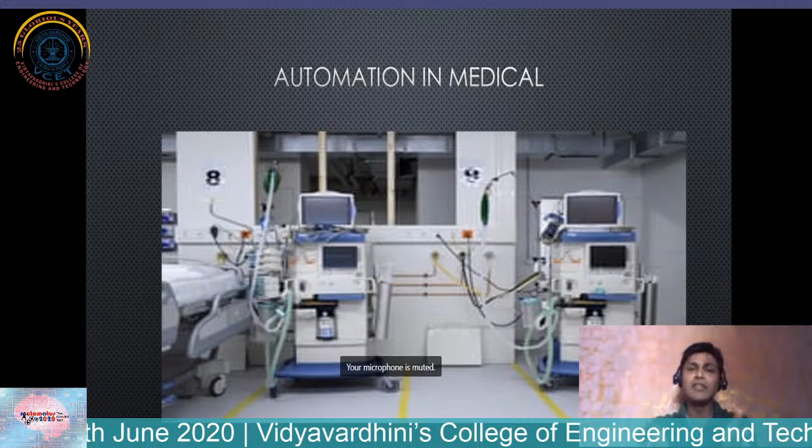So if you ask me, what is the automation in medical? We never thought about what automation could fill in medical devices like ventilators. All over the world, biomedical engineering is a separate field. But in India, especially in Mumbai University, you'll find hardly a few colleges. And that is the biggest problem, that our country is not focusing on the basic need of education, the basic need of infrastructure, where medical plays a bigger role. So let's have a look. What is the automation in medical? I will talk about the ventilator.

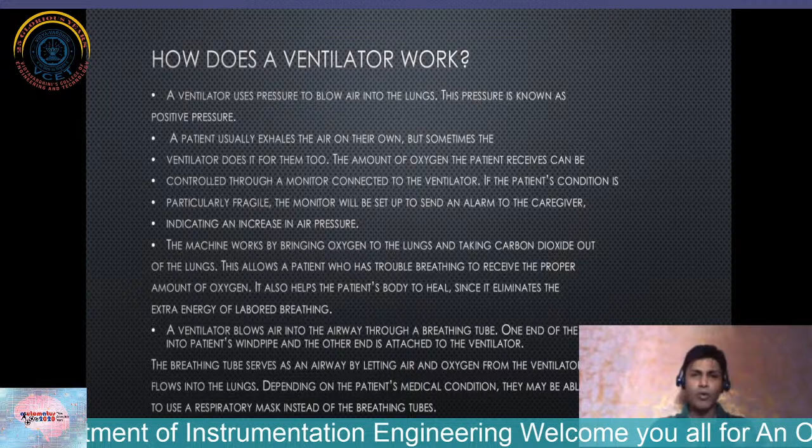Now, the medical industry is the least or zero affected in any recession. It may be the recession of 2008. It may be the recession currently going on due to coronavirus. The medical industry will never be affected in future also, because medical is the base, it is essential to human life. Now, talking about ventilators, why did the demand go high? Being a technical person, you have to think a little bit commercially or economically also. There was a time when the engineer used to take a screwdriver or repair with a multimeter. Those days have gone. You have to think jointly how it works techno-commercially.

This demand hyped up because, due to this virus, the oxygen level in your lungs goes down, and you need the ventilator. This is the basic principle of how ventilators work. The ventilator blows pressure into the lungs, which is known as positive pressure, and when you pump out the carbon dioxide away from your lung, it's called negative pressure. The patient usually exhales the air on its own, but the ventilator is a mechanical device used to pump the amount of oxygen based on the condition of the patient, and it is monitored. Now, what does monitored mean? The word monitor connects us with automation.

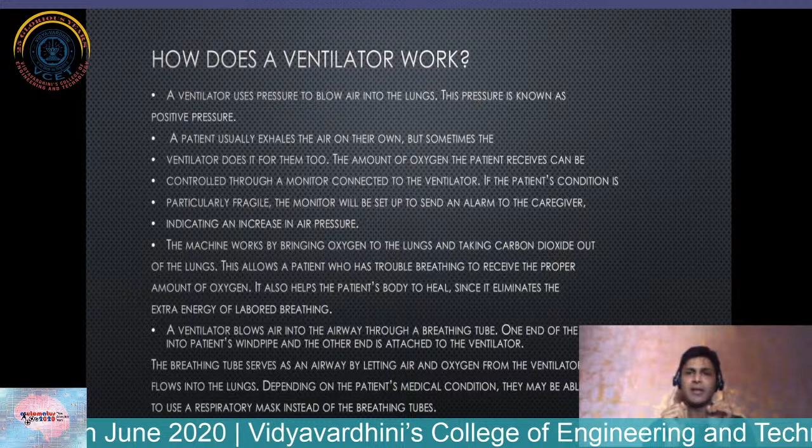Though it is called a mechanical ventilator, this complete ventilator has a microcontroller or PLC, HMI, programmable, and there are products which play a major role, without which the ventilator won't work. That is the sensor. Now, which kind of sensor is used? I'm going to come to how the sensors work, what standard they work to, how these sensors are modified and shortlisted, and what are the brands or makes in this.

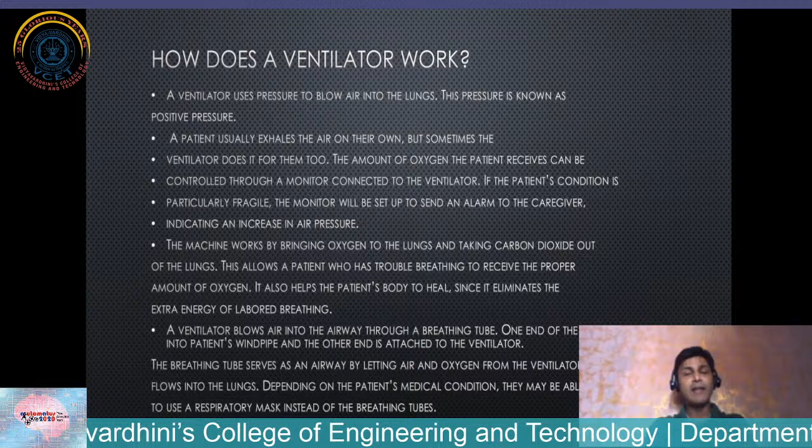So going further, as you know, ventilators are required and we require air and oxygen in this. Basically, the sensors which play a role are the oxygen sensors, the airflow sensors, and the pressure sensor. Oxygen is essential. When oxygen comes from the cylinder and blows into the lung, it has to go in a proper amount based on the patient condition, as well as the air. Secondly, the pressure has to be controlled.

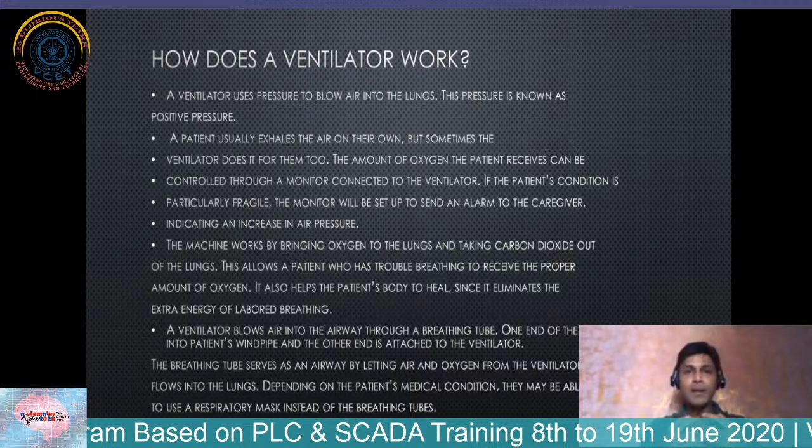If the pressure and the flow is not controlled, definitely the patient will die because of the excessive blowing of the air before he will die of coronavirus. So there are many cases which came on the news also that it was due to the ventilator failure. Long back, I remember 1 year ago, because the oxygen cylinders were not available, the ventilators were not working, a few kids died. So this is what the ventilator is all about.

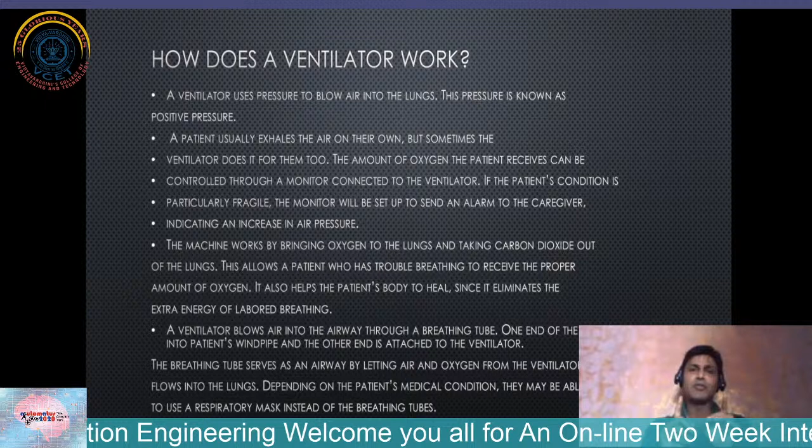If it is not calibrated from time to time and it is not properly working, this failure may lead to death. So it is very important that a ventilator should have proper sensors in it. And the three main sensors, I'm repeating, are oxygen sensors, airflow sensors, and pressure sensors, which play an important role. So sizing of the sensors is very important. So this is all what ventilators are about, and everybody is aware about ventilators.

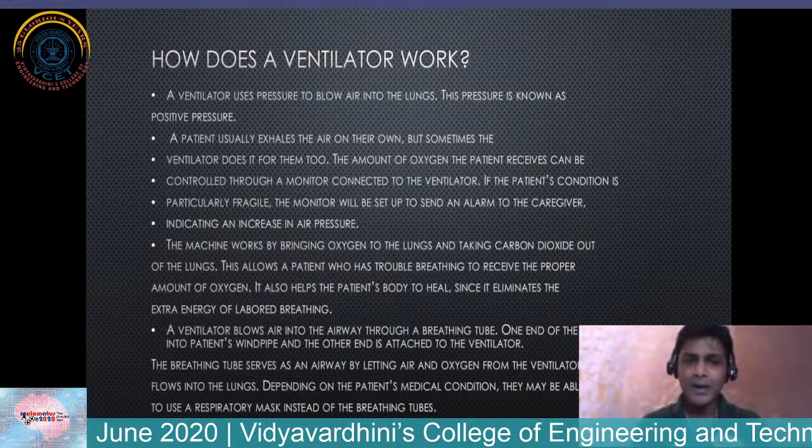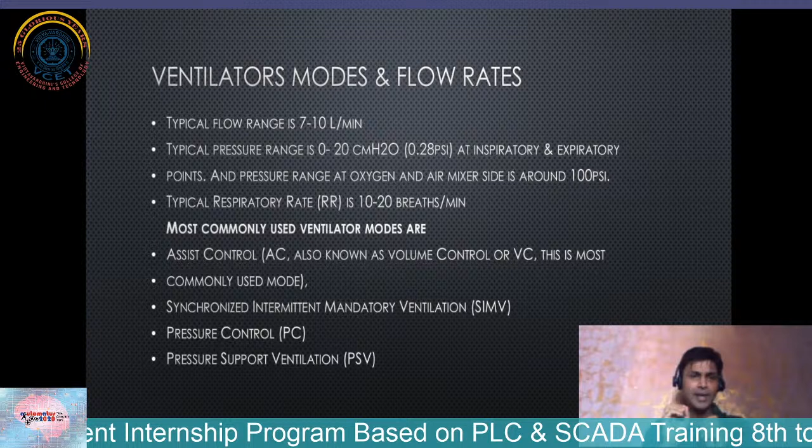Now, the typical types of ventilators are portable ventilators and stationary ventilators. There are ventilators which are used in ICU, but they are a little different, because ventilators basically depend upon the working mode. So let's go forward and try to understand what the ventilator modes and the flow rates are. Now, a typical flow range is 7 to 10 SLPM, standard liters per minute, and the typical pressure range is 0 to 20 centimeters of H2O. This unit, cm H2O, is typically used in medical applications or medical devices.

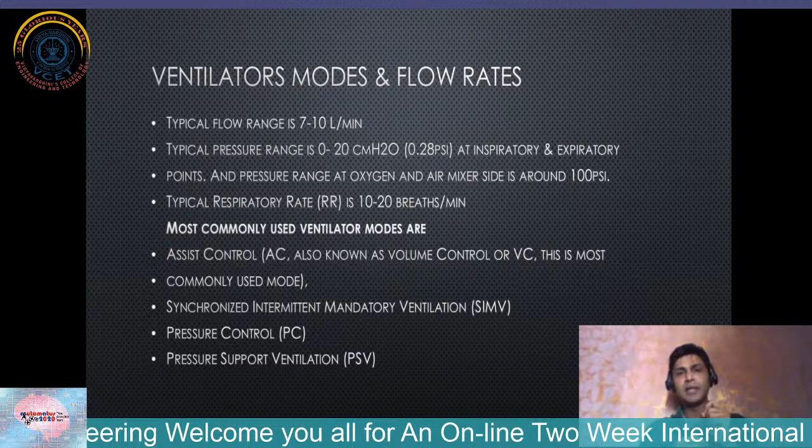So when ventilator manufacturers come to us for selection of a sensor, we know what first question to ask. A ventilator manufacturer says, okay, I am manufacturing a ventilator, so I need a sensor. We ask the first question from an engineer's point of view: what kind of sensor do you need? We need to know the flow rate. For the airflow sensor, the standard rate for airflow is typically around 0 to 200 SLPM. It varies, 100 SLPM.

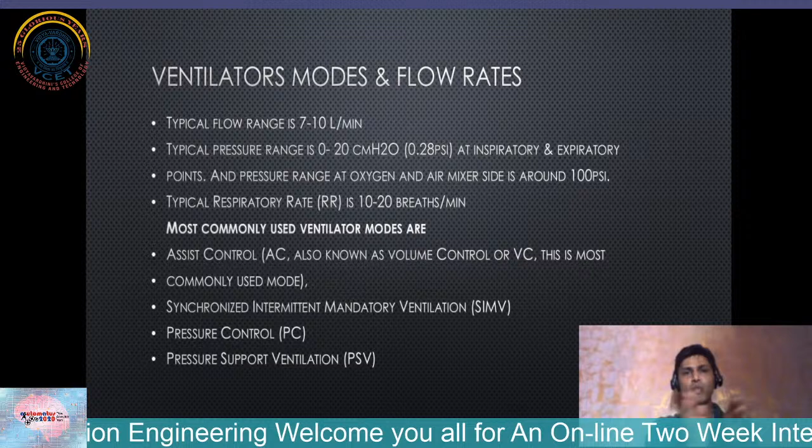But when the pressure range comes, we again ask whether the pressure is going into -1. Many times, the pressure range is different for each ventilator manufacturer. Typically, one of my customers is taking a -1 to 1 pressure range, so it comes to -1 psi, which is the typical pressure range he believes. Other customers have different pressure ranges. So it depends upon the flow range and the pressure range, and it depends completely on the design and where they are going to use it.

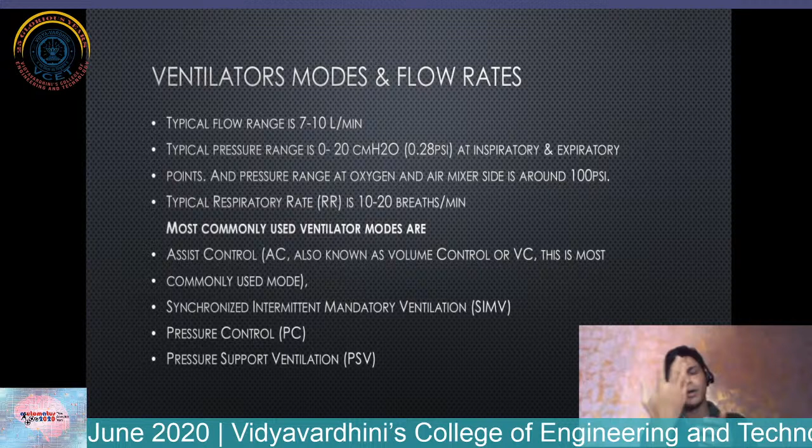These typical ventilators I'm talking about are adult ventilators, for 12 years or above. So typically the customer asks me for airflow sensors, pressure sensors, and the oxygen sensor. Now all these sensors depend upon the flow rate for the airflow and the pressure range for both. So typically when the customer designs it, they require all three sensors. Any ventilator manufacturer, without the sensors, can't manufacture the ventilator.

Now, coming to the airflow sensor, there are two types of sensors: first is the disposable type, and second is the stationary type. The word stationary means that the airflow sensor will typically be mounted in the design of the ventilator where the air comes from the cylinder. But the disposable type goes almost near the nose or mouth of the patient, and after it is used for one patient, it is disposed of immediately. It can't be reused. So these are the differences between the two sensors.

So in future, if you visit any ventilator manufacturer or a hospital, if you find some sensors near the mouth or the nose of a patient, those are typically disposable type airflow sensors. And if you find normal tubes, the sensors are inside the ventilator. So this is the difference between the disposable type and the stationary type airflow sensor.

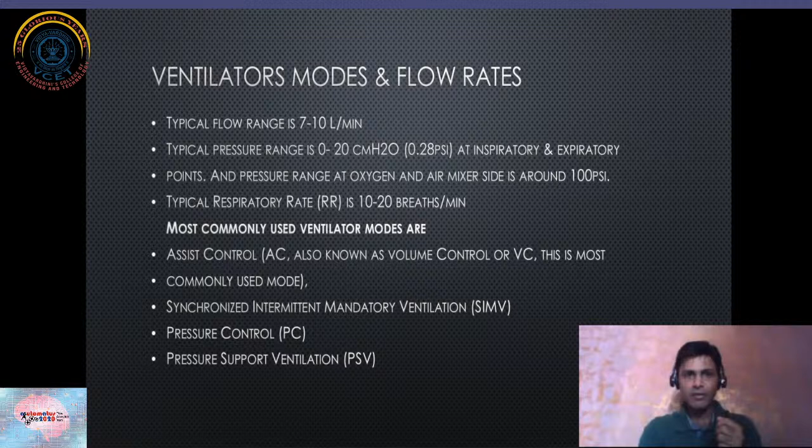It depends upon the design, because there is a humidifier before the ventilator, and the temperature, because when the air flows, it matters at what temperature the air is blowing: standard room temperature, which is allowed, or well below or above room temperature. So there are typical sensors like the HIH series sensors from Honeywell that we propose. Pumps, motors, these are the basic things.

So basically, before the valve, all these sensors are placed in front of the patient. Unfortunately, I was not able to add the actual flow diagram or block diagram showing where the patient and ventilators are placed and how it works, due to some constraints of my PPT and lack of time. I'm really sorry for that. But these are the basic components in the ventilator, and all the manufacturers go in this typical way.

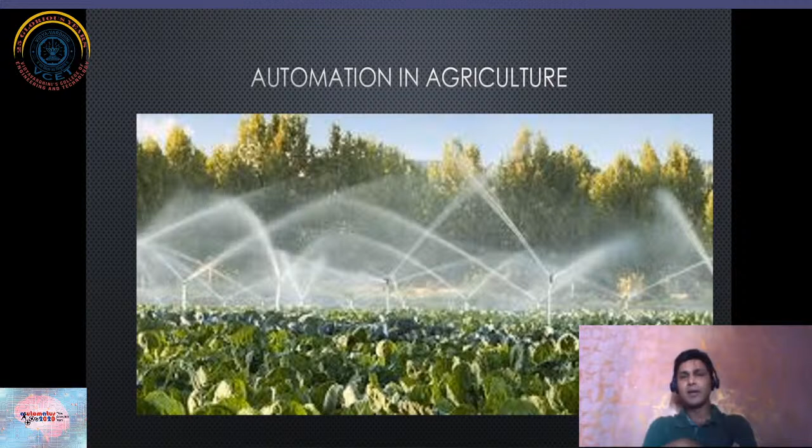Now this comes under automation in infrastructure. In a city like Mumbai, where I stay, there is a problem of car parking. Due to car parking, many people plan to take not a sedan but a hatchback. Why? Because of the parking problem. I have no parking in my lane. I have no parking at my office. We travel by train, but the train is overflowing. So what to do? So now, to avoid the space constraint, there is automation in parking.

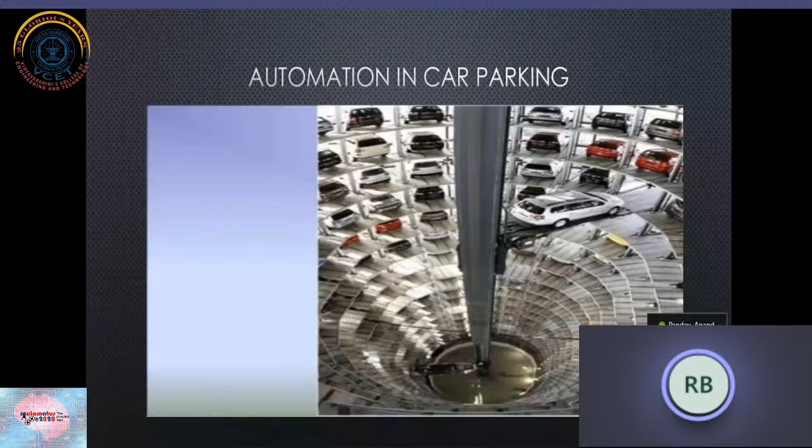So you will ask, what is the automation in this? The main automation is that all this is programming based. So how is it program based? Take an example of puzzle parking.

Now in puzzle parking, I have a car above me, a car below me, and a car next to me. Now I have this WagonR, I have to remove this car. So this car has to go on the side, behind, upside, or front. Then this plate will come down and I will be able to take it down.

So all this goes to a PLC programming, and this PLC programming is done by the automation engineer. There are two strong companies in India. One is RR Parkon, the group of Ramratan, RR Kabel. That is RR Parkon, one of their entities.

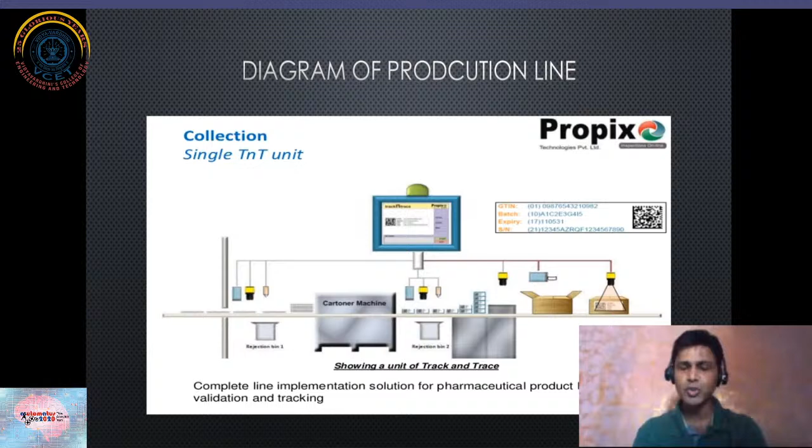I will show this in the next diagram. This is how a typical pharmaceutical production line works - the line integration, generation of the serial UID at multiple levels, and integration. This is the core, this is the thing which is very important in your medicine.

Now, if you recall, two months back when hydroxychloroquine was banned from India, and Trump asked our Honorable Prime Minister to start the supply, there was news on social media that India had asked to ease the rules of the US FDA. Now, the US FDA - whenever Indian companies are struggling to export maximum ready-made medicines to the US continent - the problem is that the US FDA feels Indian manufacturing is not up to the standard mark of the US FDA.

So what does this mean? In India, Sun Pharma and Cipla, they have faced this US FDA issue. Let me take you back to when I was working at Mitsubishi and handling this project, for a company called Sun Pharma. Overnight, there was a ban by the US FDA that none of their products would be allowed on the US continent or European continent. They were shocked - why? Because their production facilities were not up to the US FDA mark.

So what to do? Yes, you have to upgrade. What's the upgrade? Your GTIN number, your expiry date tracking, and a track-and-trace application had to be implemented. After that, within a span of 6 months, Sun Pharma's Halol plant upgraded - almost 500 machines were upgraded - and they came up to the US FDA mark. Then Cipla was the second one, in 2016, implementing this at their Patalganga plant, and all their plants came up to standard.

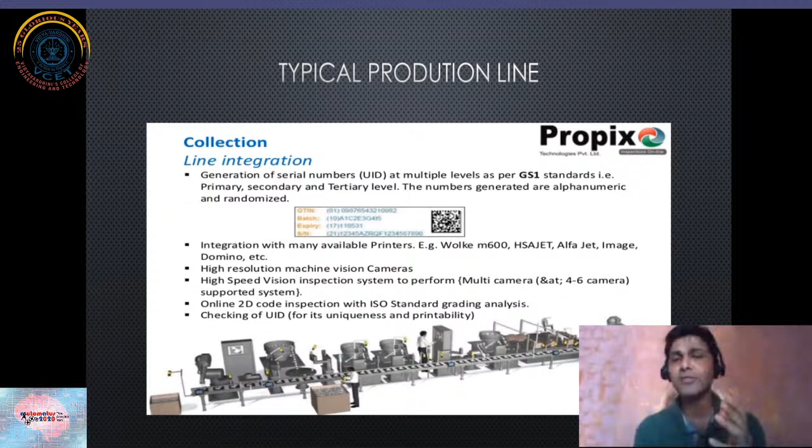Again, you have your cloud license, your camera, your high-speed resolution vision machine - everything has to be implemented and upgraded. So this is the cost involved. Typically, if you want to invest in upgrading 10 lines, your budget should be more than 5 to 10 crores. This is what the pharma industry was struggling with, but luckily the Indian pharma industry identified the challenge and made all these changes.

So this is how the typical collection works. Typically, the local pharmacy, when they track and trace, connects to the global server. This is a pharmaceutical plant. When they dispatch it, there is a wholesale pharmaceutical in between. They will know which batch it was manufactured in, at what time, who was the operator handling this, when it was introduced in the pharmaceutical wholesale, and when it was distributed. So the trace will definitely move back slowly to the manufacturing plant.

Suppose a Cipla medicine malfunctions. So it was manufactured in which plant of Cipla? Whether it was the Pithampur plant, the Patalganga plant, or any other plant. Once the plant is identified, they will identify the batch number, on which day, who was the operator, who was the engineer, who was sitting in the control room, and they will take the trends of the SCADA, and everything will be investigated and they will come to know.

So this is the implementation of US FDA. They know the life of the human being is precious, and that's the reason all the data collection is in the micromanagement system. In India, they've already started this. If you see your medicine, you will find the QR code, the 2D code has been implemented.

So this was all from my side. Now this is the question and answer session. If you would like to ask a question, you are open to ask.

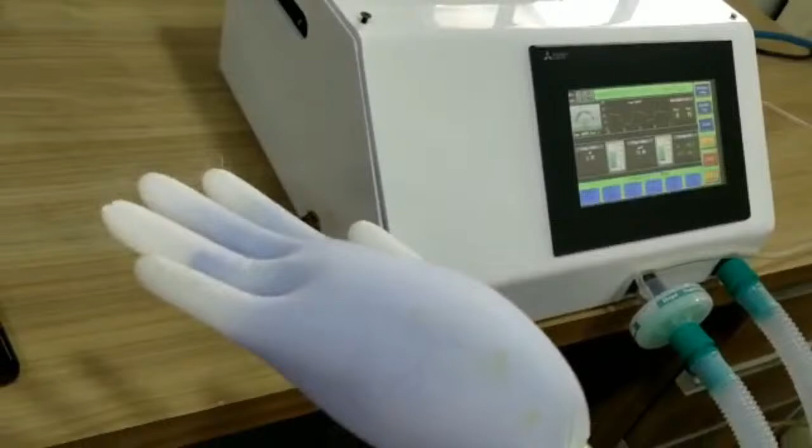Okay, just let me know when it started. Okay. Started? Okay, okay.

Basically, you can see this is the HMI, and on this HMI you are controlling all your graphs and the patient. Normally this is the prototype, no patient is connected, but instead of a patient I am using this. This is the lung, I'm blowing into it, contracting and expanding it. Just see. Okay, this is the ventilator.

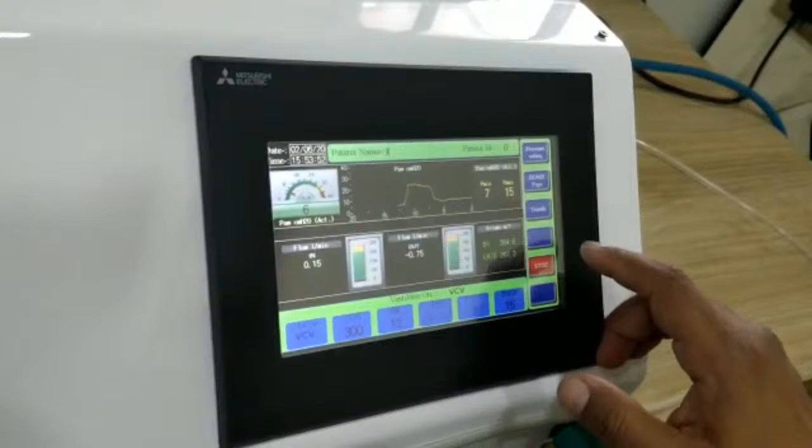This is the top part of the ventilator, where they have fed the recipes, different recipes. This is the reading, you can see the graph, the reading of the airflow and the pressure is monitoring where the respiratory condition of the patient is monitored by the doctors. These are the different settings you can see.

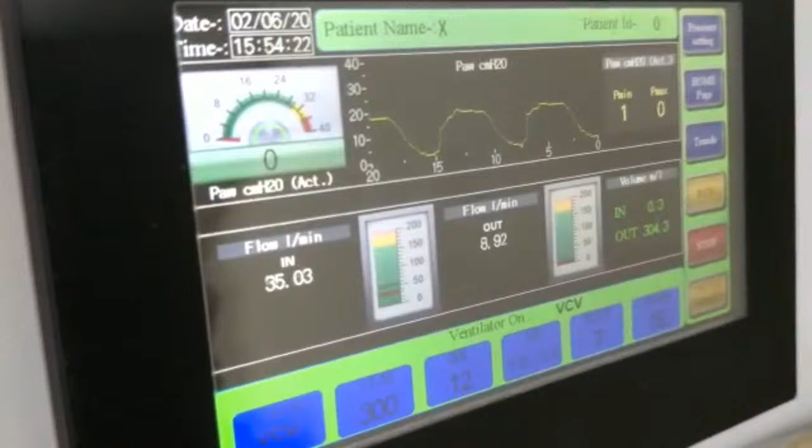Basically what I mentioned here is the PCB, there is a microprocessor controlling this with a pressure sensor for monitoring, and a pneumatic manifold with bellows, because our lungs are basically made like this, they expand and contract, so that's the reason we display this when we inhale.

So we can adjust the frequency, and we can adjust the minute volume.

So this is what the design is all about. As I mentioned in my PPT, there is no rocket science in ventilators, and I missed one point - there was news 8 days back in the newspaper. See the bellow, you can see it expanding and contracting. This is how the patient inhales and exhales. So this is what the prototype is all about.

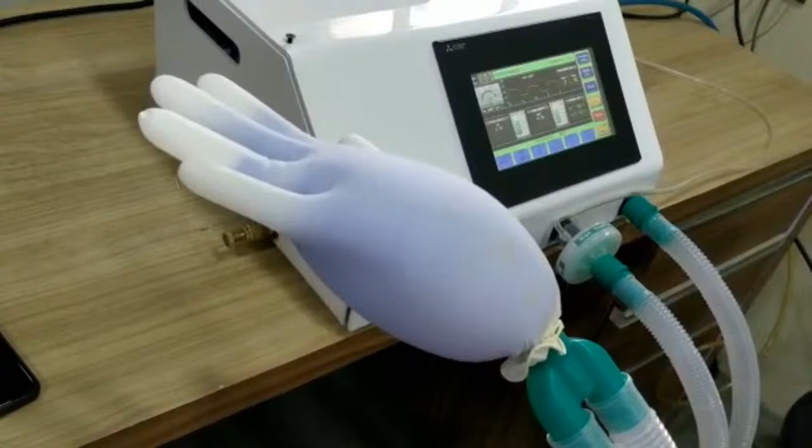I was mentioning that NASA, the space heroes of the world, has transferred the technology of ventilator making to 3 Indian companies, one of which is an automobile company.

These are the settings for pressure limit, frequency, and volume. This is a very basic project that final year students can do. Disappointingly, I see final year students go for very basic projects. They should take risks because you are the seniors, you are the future of the country.

You need to do some great project. What I've seen, you can go on the medical side. One thing I observed is that instrumentation students don't go on any biomedical project. They had a biomedical subject, but they don't go on a biomedical project. They can go on biomedical projects. They can go on basic incubators and all, or they can go on some IoT project, the basic project. So there are many projects to discuss. It completely depends upon the interest and the budget of the student.

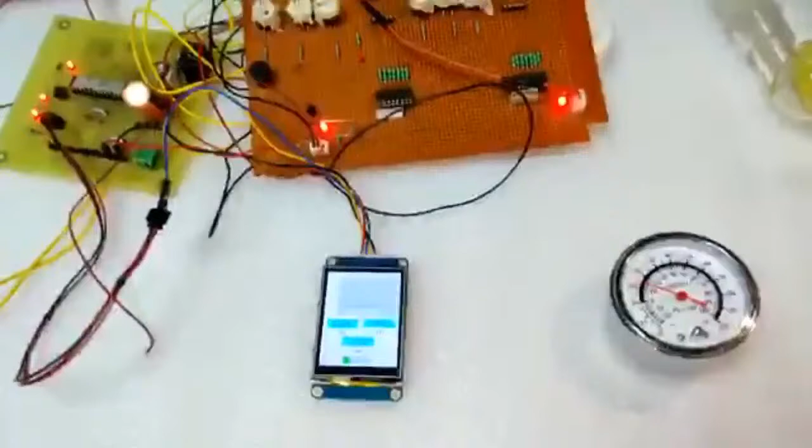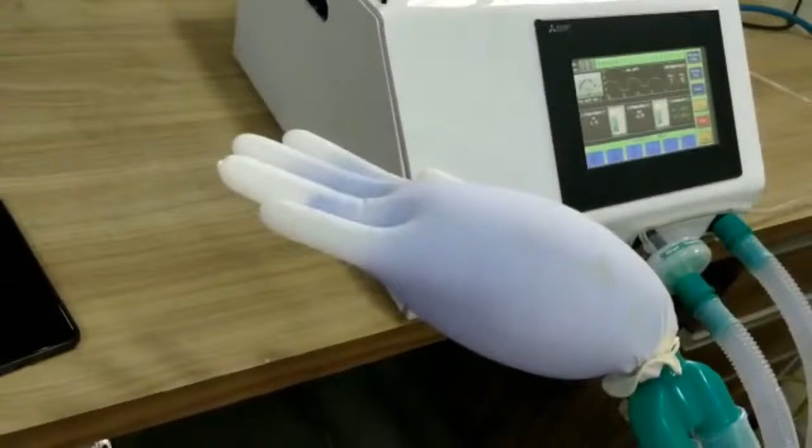The next question: which are the free software of PLC and SCADA? As of now, in the world, there is nothing free, you can say. But there are some makes like Omron Automation. They have a free trial version of 1 month online, so you can download it and have it for 1 month. But PLC software is where the company margins are attached. So I have never come across any free software for SCADA and PLC, but there are some trial versions for 1 month. You can try Omron Automation.

What is the cost of this ventilator currently? Now, this is a very tricky question. Hopefully I will not be seen as a competitor of any ventilator manufacturer with this answer. So see, if you see the news, Mahindra claims that they have manufactured ventilators around 5,000 to 10,000. But the story behind this was different. Mahindra just developed a prototype in which the sensors and valves were not there.

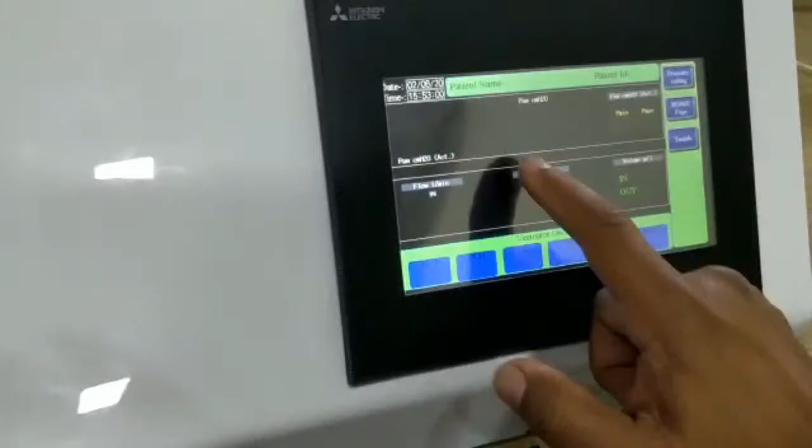The sensors cost you more than 10,000, and a minimum ventilator, even if you reduce the cost of everything, costs you around 80,000 minimum. And if you go for the additional PLC, the HMI, and a very high-tech ventilator, it will cost you about 2 lakhs, 3 lakhs. It completely depends upon what kind of BOM, bill of material, you are adding in it.

Sir, can you give a brief about the IIoT sensor? So basically, it is the IIoT sensor with an IODD chip. It's a sensor which looks normal, but if you open it, there is a chip inside. Cost-wise, a normal proxy sensor costs you around 100 rupees, 200 rupees. If you go for a brand, 500 rupees, and the IODD IoT sensors cost you around 1,200, 1,500, depending upon the make. So this is a brief.

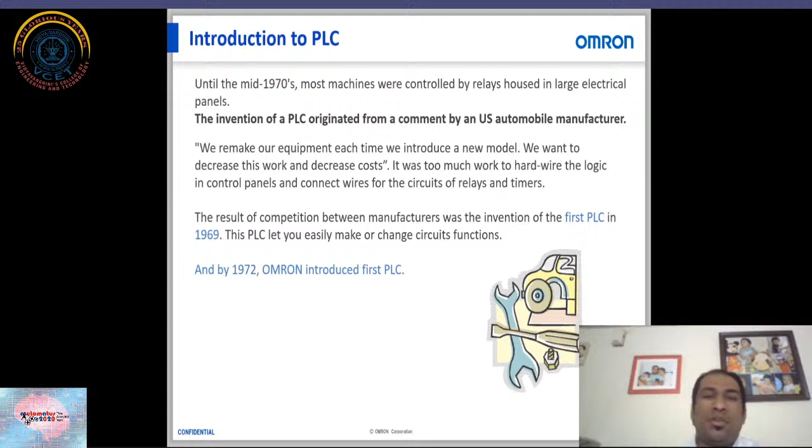So what is basically a PLC? A PLC is a solid state device which simulates electrical components including standard relays, latching relays, electronic timers, counters, and other components, or it's a digital electronic device with a programmable memory. So based on the input devices you connect, the logic you develop, and the outputs which are connected, you can build a digital electronic device with a programmable memory.

But let's talk about the relay-based system or hardware type control panels. If you want to make any small modification, so much work is involved, so much wiring. And sometimes if there is a small disconnection from the panel, you may have to backtrace all the way to the panel. So it was a very hectic job. So now came the PLC. The PLC reacts to changes in signal sources such as push buttons.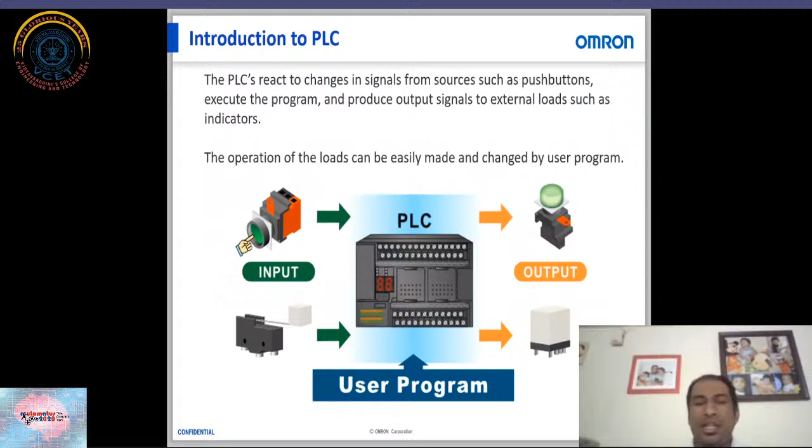Motors too, all these are considered as outputs. So basically we have input, then logic, then output. These are the main things related to a PLC. Now let's see the PLC block diagram.

So why have we introduced PLCs in industry? Earlier we had relay systems, then there came a requirement for a more rugged system which can be programmed. But why can't a PC be used in industry? Because PCs are unreliable in the industrial environment. So we cannot go ahead with a PC based system in industry if the environment is not good. So we came up with the more rugged model, that is a PLC.

So let's see the PLC block diagram. It is similar to the desktop PC you use at home. We have an input interface, just like you have a keyboard and mouse, then you have a CPU, that is basically the PLC CPU. So microcontrollers will be inside: memory, CPU, and then power supply should be given to the CPU.

Then you have a display, that is your display screen. We have output devices. So if you compare it with a PC, it's similar to a PC only. We have an input interface, we have a controller, that is a CPU, then we have an output interface. If you talk about PLC, we have an input interface. Similarly, we have a CPU, wherein you have to give the power supply to the CPU. Then we have output devices.

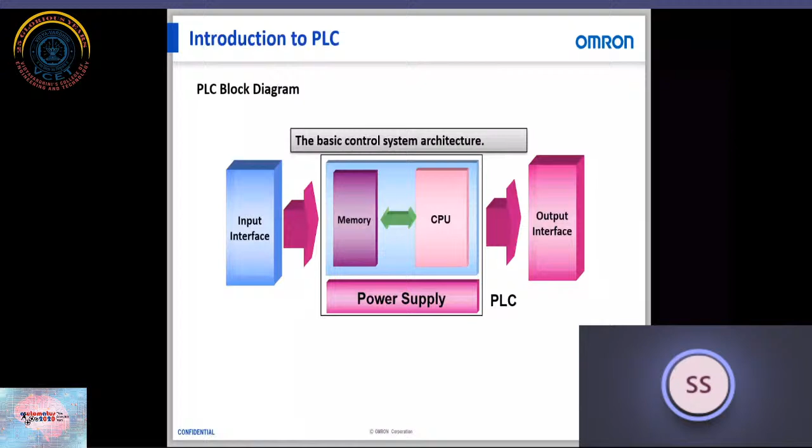Before going further, I would like to explain that when you talk about the CPU part or the controller, normally in PLC we use an application specific IC. So that is known as ASIC. So an application specific integrated circuit will be used inside a PLC, not a microcontroller based system. Earlier it was not used. Earlier it was only application specific IC.

But now, if we talk about Omron, we have introduced our Intel based system from 2011 onwards. So we have high-end controllers, one of the most sophisticated controllers we have right now, which is operated by an Intel Core processor. So an i7 processor we have in our controller now. Similarly, in the old system we had microprocessors, that is ASICs were used, application specific ICs.

Coming to the input interfaces which we normally use. If we talk about PLC, normally we discuss only digital input or discrete input. In discrete input, we normally have only an on or off condition. This is either 0 or 1. Just like in a PC, you have a binary 0 or 1 system. Similarly, in PLC also, we normally prefer discrete inputs, that is either 0 or 1.

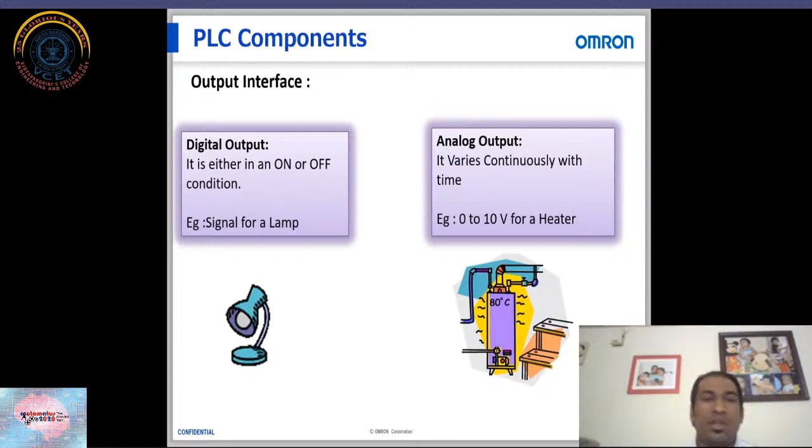If you see the conventional panels which we used years back, everything is relay-based logic. Now also, in PLC we have ladder-based logic, which is similar to the connectivity we do in relays. We are using contacts and coils in that also. But the amount of wiring used in conventional panels is very large scale, and if you want to modify a small logic, it involves so much wiring.

So without PLC, it is necessary to rewire devices to change the operation of machines. With PLC, you can simply change the logic from your PC or your laptop, and you can directly program it into the PLC. Only minor changes are required. We are not saying we can completely remove the wiring part, but wiring will be limited.

So what are the advantages we have compared to the conventional panels? We have smaller size and more flexibility than their hardwired equivalent. Then the diagnostic function. This is a very important function. The diagnostic function makes monitoring and troubleshooting very easy.

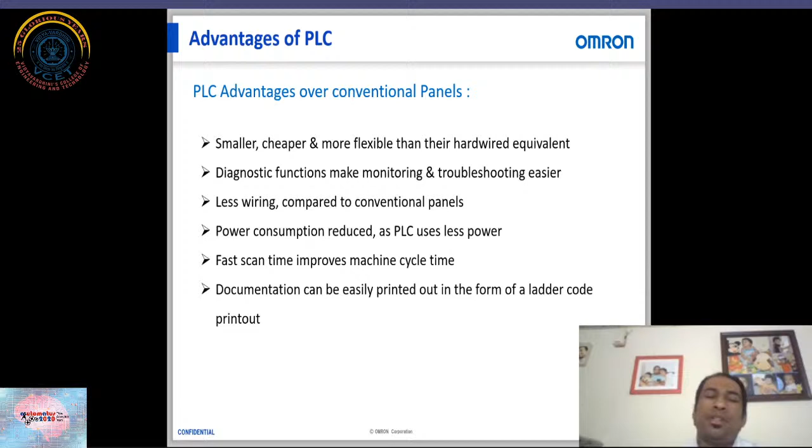Then documentation can be easily printed. That is, if you have developed a logic in ladder logic or any other logic, and you want to make a manual out of it, you can simply print the logic directly from the software.

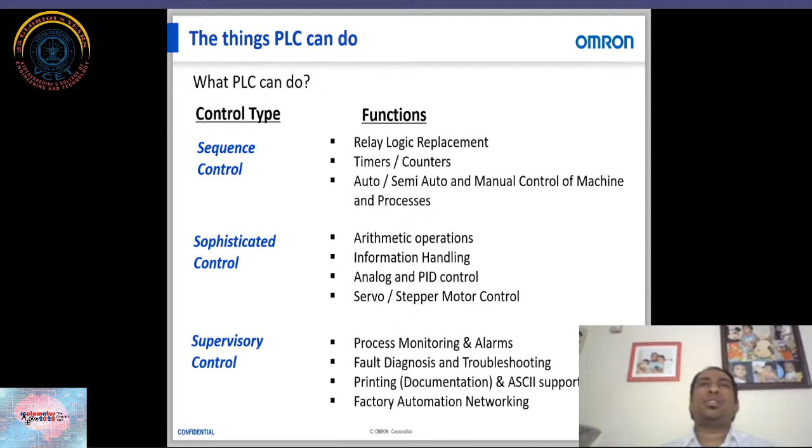Now coming to the things a PLC can do. PLC is basically a programmable logic controller. What it can do is sequence programming. Based on the sequence you write, you write the next line. Let's take an example. I'm going to light a lamp using an input. I'll take a contact of an input, then give it to a coil. Once the contact is enabled, the coil is enabled, so the lamp is lit.

After the lamp is lit, you want to operate something else, let's say after a delay of 5 seconds. You can take the output and give it to a timer. The timer will operate for 5 seconds, and after 5 seconds you can operate something else. Let's say I want to switch on the motor, sequential motor operations. So you are writing the sequence one by one. The first line is the logic for switching on the lamp, the second line the logic to switch on the motor. This is basically sequence control.

You can see on my screen what things a PLC can do. Basically a PLC normally does 3 things. One is sequence control, which is relay logic replacement. That is basically developing the logic. Timers and counters can be utilized in a program.

Then you can develop auto, semi-auto and manual control of machines and processes. If you want to write logic for a completely automatic system, that is possible. If you want semi-auto, with your intervention, that is also possible. Let's say some error comes and you don't want the system to reset it automatically; you reset it yourself. That also can be done.

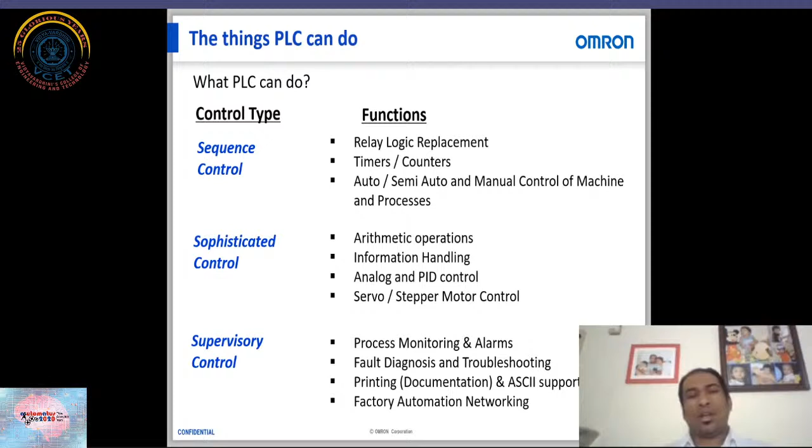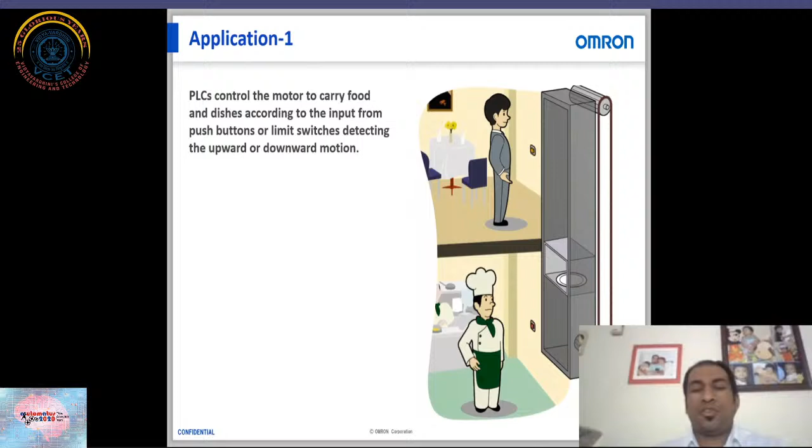At Omron, we mainly focus on machine automation areas. We have some presence in the process industry also, but mainly our areas are machine automation, where we give all kinds of solutions. Now I'll give a small example. Here you are using the PLC to control the transfer of food. Let's say this is a restaurant or hotel segment; it is a very simple application. The PLC controls the motor to carry food and dishes.

Oh, am I audible now?

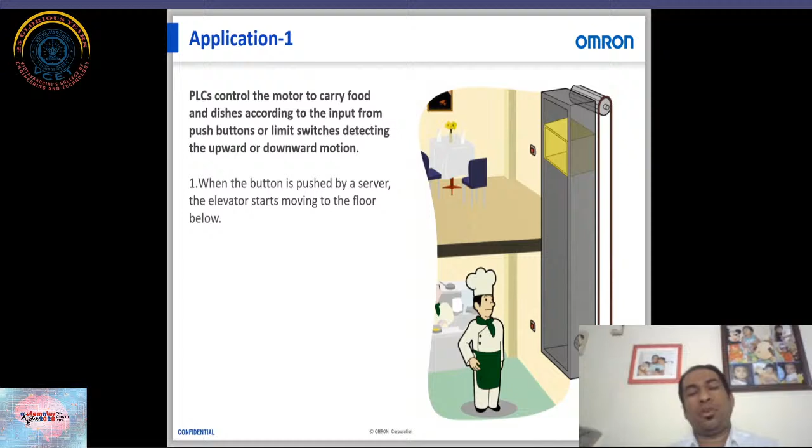So now you can see the slide. The PLC controls the motor to carry food and dishes according to the input from the push button. When the button is pushed by the server, the elevator starts moving to the floor below. When it's pushed back with the dishes, it comes back to the floor again so the person can serve the food to the customer. So in this, a simple PLC is used, and these operations are carried out by the motor.

You need to use a contactor if you want to switch large loads. For small loads, relays are sufficient. If you want to use large loads, then it's always better to go with the contactor.

Now I'll give one simple example in the bottling line, showing how different operations are happening in the line. So our machines are operated in a factory. If you take any factory or any industry, everywhere the PLC will be involved. No matter which make they are using, people will be utilizing PLCs everywhere.

Now let's see this process. This is a bottling line. In the bottling line you can see different processes involved. First is the bottling and capper process. Second is the shrink labeling process. Third you have the time stamping process, where you print the barcode, then the manufacture date and batch code, and then it goes to the packaging process where these bottles are packed, and then to the casing process for the final dispatch.

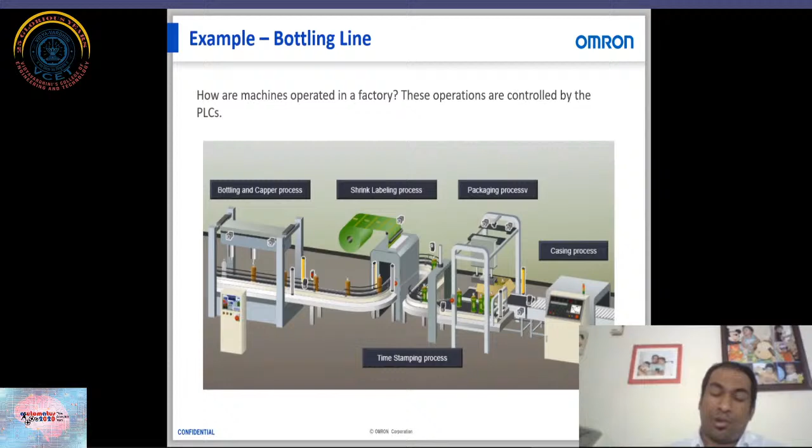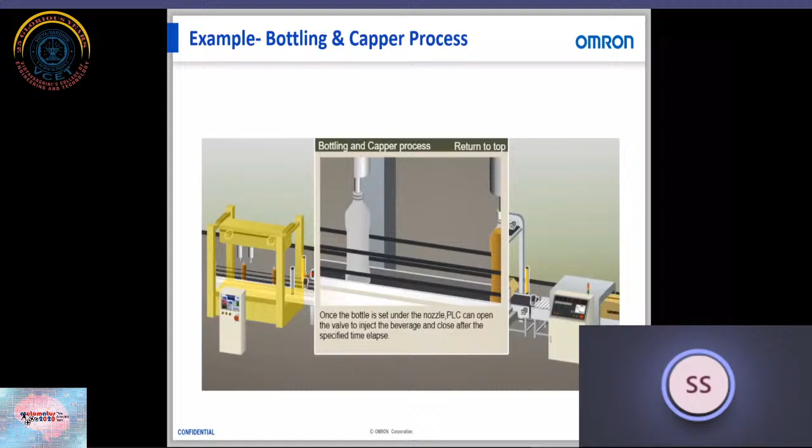After filling the liquid, you can check whether it's properly filled, or whether the amount of liquid entering the bottle is proper. If you want confirmation of that, you can use a vision system. Once it is done, the cap is closed and it goes to the next section. So when an empty bottle is set, the content is filled and the capping machine seals the top of the bottle. This is the first process we do in a bottling line - the content, which is either water, juice or anything else, is filled, and a capping machine seals the top of the bottles.

Once this process is done, it goes to the labeling part. For labeling, you would have seen so many products - let's talk about aerated drinks only. You have Coca-Cola, Pepsi, Fanta, so many things. How is it defined? You can see the label on top, and the color also will be different. So next is the labeling process - the sensor detects the thickness of the sheet roll.

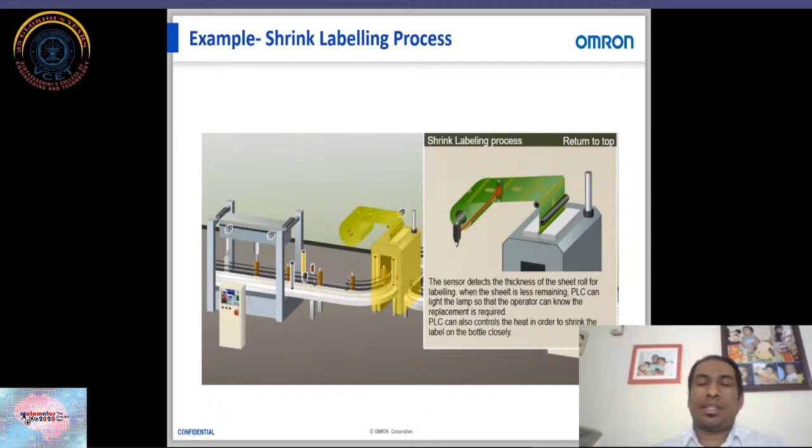You can see the products involved in this, the sensors which are there, and a control panel on top with a hooter or alarm system. Now when the filled bottle comes to this section of the line, a filled and sealed bottle is covered with a tube shaped label - if it's a round bottle you'll have a tube shaped label - and hot air is used to shrink the label closely. Once it's attached, it will be shrinked. This is basically the shrinking and labeling process.

You can see on the figure the roll of labels that are given, and the sensor attached along with that. This sensor basically checks the roll size of this label. When it reaches the minimum size, it gives an error, and the hooter attached to this panel gives an alarm. Then the operator comes to know it's time for him to change the roll. This is the second part of this line, where you do the labeling.

Now coming to the time stamping process. In the time stamping process, what it does is basically print the code on this label. The label will have the name, the content, everything - but what about the production time?

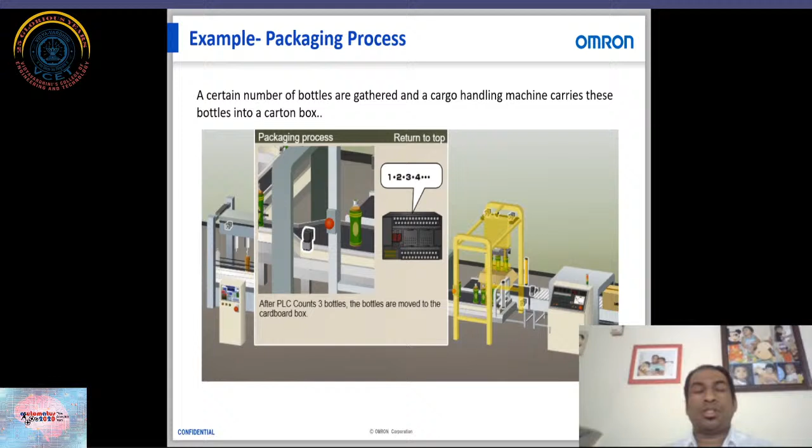Now the last process is the casing process, where the carton boxes are handled. Earlier machines used cargo handling, but now, if you see the latest advancement, a robot does all this work—even the packing part and sealing part can be done with the help of a robot.

If you are using an articulated robot, a 6-axis robot with the help of a gripper can pick and place all the bottles in the carton box, and it can also do the sealing part. So in different production lines, you can see different advancements with respect to different areas.

Earlier we had PLCs with only serial, point-to-point communication, then it moved to RS485. So many advancements have happened. Nowadays we use Ethernet IP and EtherCAT for device-level operations. EtherCAT is now one of the fastest networks available for devices, with the same speed as Ethernet IP, 100 Mbps.

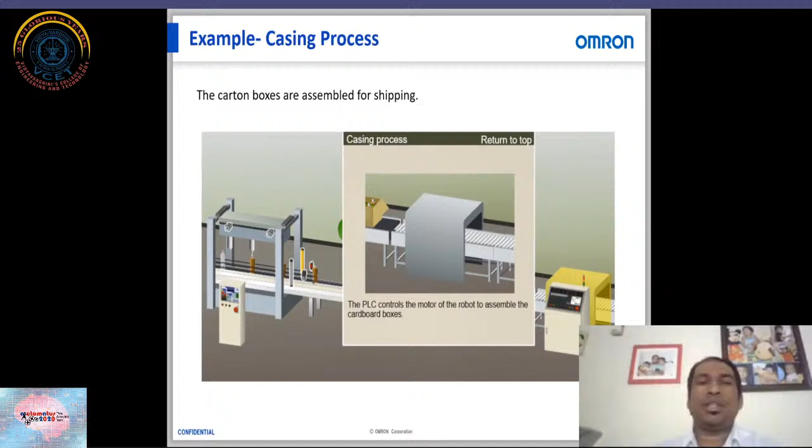So many advancements have happened in the areas of automation. Now talking about PLC—today's topic is basically PLC. I've just given an overview of a simple production line. So many areas are there where PLC can be utilized, like machine industry, machine tool industry, automotive industry, and F&B, food and beverage, FMCG. So many areas are there where we can utilize programmable logic controllers.

Now coming to selecting the right PLC. You've heard about PLC, how it came into existence, and what components are used, but how to select the right PLC is up to you. For students learning about PLC, there are many things to learn because so many PLCs are available in the market now, each with its own advantages. So how do you select the right PLC? Here are some common points you can use.

First is the application type. You need to check the application type—in which particular industry you are going to use this PLC. For example, in a packaging industry, you will require a high speed counter input or pulse train output, so you may need to use high speed inputs there.

If you are talking about process control, so many valves will be there, so many things will be controlled using analog values. So you have to go with analog. Then if it's a load cell application where you need precision, the devices or modules which you use should be compatible with the PLC. So first and foremost is the application type before selecting a PLC.

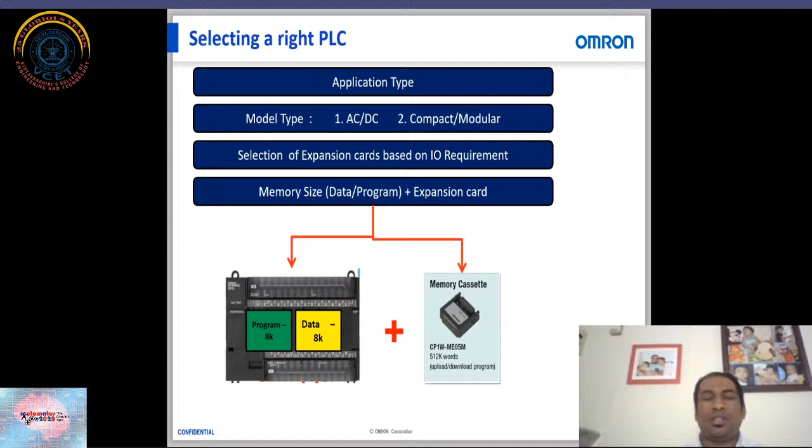Earlier PLC systems were using a PLC memory cassette, but the disadvantage was the memory size is very less compared to the new system. Earlier it was memory cassette, then flash card memory came. Now in the latest controllers, we are using SD card, so you have the provision for 16 GB, 32 GB in the modern controllers.

The next part is the scan time or execution speed. You would have heard about the PLC scan time. So what exactly is the PLC scan time? It is basically the time it takes to scan all the inputs connected to the system, then the time it takes for the program to execute completely, then the output part. Input scan, program scan and output scan together we call the scan time or cycle time.

But there is one more thing. If you are using a standalone system, you have only these three: input scan, logic scan, output scan. But if you are communicating over any communication protocols, let's say some remote IOs are connected in the system, from remote IOs you will get the request to take the data, or you want to publish some data to other devices. That also will affect your scan time.

That we call peripheral devices. So we have input scan, logic scan, then output scan, and in between you have peripheral devices also. That also will be involved in your scan time. So based on this, we cannot give a particular scan time.

Let's say some PLC will say we have a provision of 4 nanoseconds. But as you write the logic, the scan time may increase or vary. You cannot fix scan time on any PLC, of any make. The scan time will vary according to the logic which you are writing.

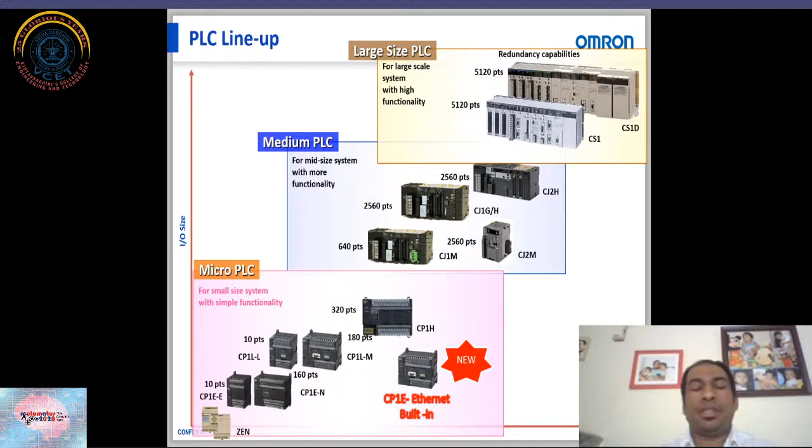But if you are using a large size PLC or a rack size PLC, which has a backplane, the backplane slots will be different. Let's say you have 11 slot, 13 slot, those types of slot-based systems are available. So once you install that, that particular space is occupied for the PLC. So in later stages, if you want to utilize that area, that is not possible. But that is possible when you are using a micro or medium range PLC.

Now let's talk about the micro PLC, the complete lineup of micro PLCs we have. I'll quickly go through this product because I need to cover more topics. In micro range PLCs from Omron, basically we have 3 series available: CP1E, CP1L and CP1H. Once the slide is loaded, you can see we have 3 ranges of PLC, CP1E, CP1L and CP1H.

CP1E is a very basic PLC from Omron. In this model, the maximum input output possible is 180, and CP1L again you have 180. If you go with the CP1H, you can have a maximum of 320. How it is coming, I'll tell you. CP1E has 3 types: E type, N type and NA type. In CP1L you have L and M type, EL and EM type, and in CP1H we have X, Y and XA.

So in CP1E you can see NA. NA is defined as having analog input and output. The A specifies that in CP1E-NA. In CP1H-XA, analog inputs are also available. So based on the model number, you can make out whether analog inputs are available in a particular model or not. So CP1E has 3 models.

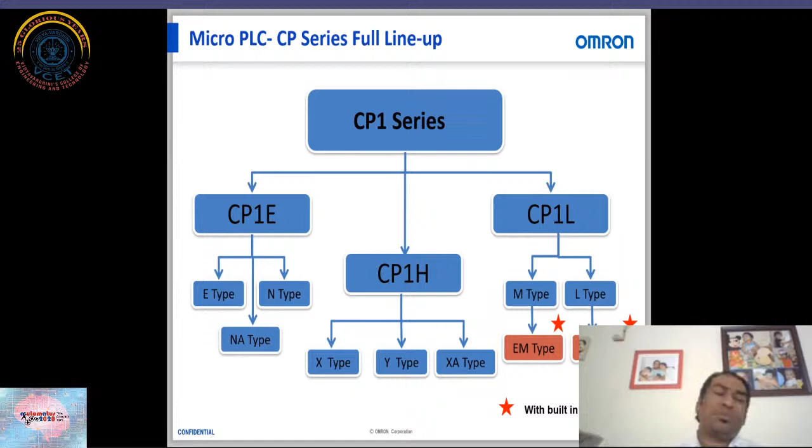So we have X, Y and XA type. X is the application type, Y is dedicated for motion control, and XA is the model which comes with analog input and output. In CP1E NA we have 2 analog inputs, 1 analog output. Now programming steps: in CP1E, the maximum programming steps, that is the ladder you can develop, is 8,000 steps. In CP1L, the maximum is 10,000 steps. In CP1H, the maximum is 20,000 steps.

Now coming to the CP1E model number structure. This will be explained in more detail when you're configuring the system. But let's see the model number structure we have in Omron. CP1E is basically the series. Then which class, whether it's a basic model or application model. Then the second one is the total number of IOs available, starting from 10 to 60, all available in a base unit.

Then 3 and 4, right now I am not going much into those, because they are new. So we'll skip 3 and 4 as of now. 5 is always input, that is digital input, and 6 is your output type, whether it's relay type or transistor type. In transistor we have sinking and sourcing type, so we need to select that. And the last one is number 7, the input power supply fed to the PLC, that is AC or DC power supply.

Okay, so is my voice audible? Is it okay now?

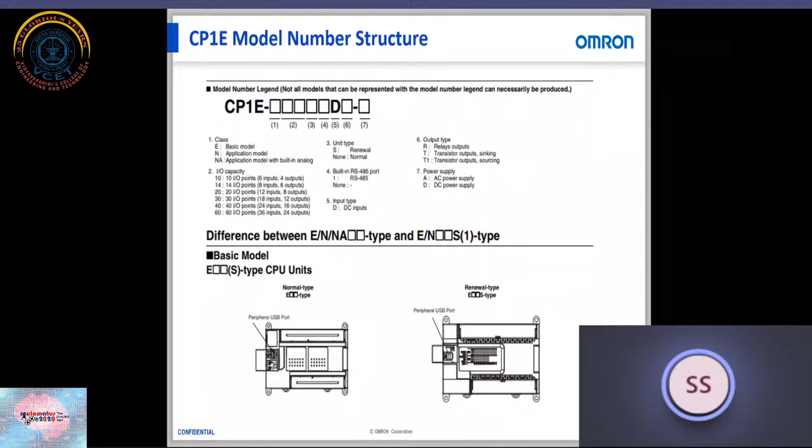Okay, I'll take it forward. So this is the part number. When you're talking about the model structure, it will be CP1E-N30DRA. So CP1E, N means the class, that is the application type. 30 means 30 inputs/outputs. Then D is always your DC input.

RA means relay type output with AC power supply, that is, the power supply which is fed to the PLC will be AC. Not analog, AC power supply. The last digit after the hyphen, number 7, is basically the input power which is fed to the PLC, whether it's AC or DC power supply.

Maximum IOs available: E is 180 IOs, N type is 180. Coming to NA, it is 140. The main difference is in the second line, the CPU base IOs. In the rest of the models you have provision like 40 and 60, but in NA type you have only one single model with only 20 IOs. So 20 plus 3 expansions.

The third line shows how many expansion modules can be connected, that is 3. If you connect 3 expansion modules, the maximum IO possible in each is 40. So 40 into 3 is 120, plus 20 is 140. That is how we get the total maximum IOs possible.

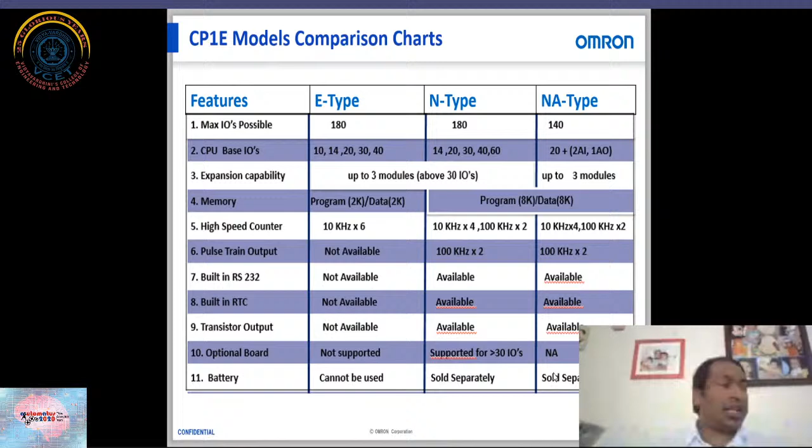A battery is used when you want to store data in your data memory. If it's not used, the data will be lost. Not the program I'm talking about, the data which you want to store.

Now coming to the architectural overview. What are the things you can do with a PLC? You have a PLC. What can you connect to it? Let's say I want to connect my laptop to the PLC. How am I going to do the programming? You can use the USB port for programming.

Now I want to utilize RS-232 to connect an HMI. That is possible with the inbuilt RS-232 port, or by using the option slot. Let's say I have a base unit with 60 IOs and I need 2 more expansion units. You can connect 2 more expansion units with this particular model.

You can use digital input or analog input. You can use digital, analog or temperature sensor units, where you can connect a thermocouple or platinum resistance thermometer directly to the unit, and it will give the data to your PLC CPU.

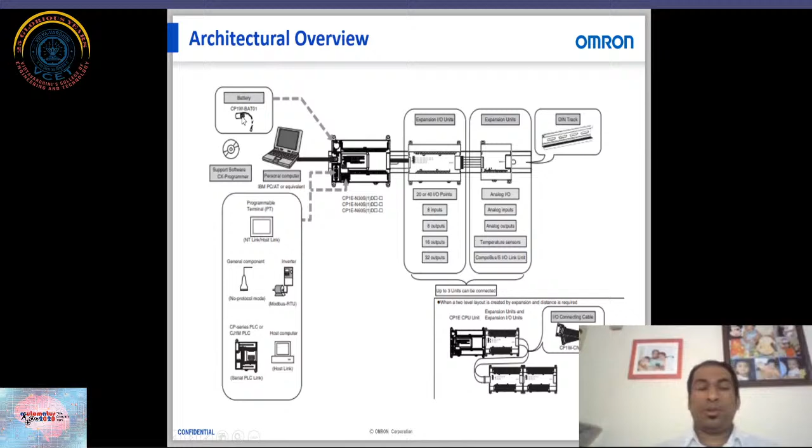So this is the architectural overview. It's a simple overview, and if you want to retain the data, then you have to use a battery. Coming to the expansion IO module, you can see the expansion IO right now. In expansion IO, as I said, we have the provision for digital input, analog input and temperature sensor, or you can use CompoBus. That is one type of network, but nowadays we are not using CompoBus.

We rarely use CompoBus now, because everywhere people are preferring open-based communication systems, wherein Ethernet/IP is very popular now. So you can see the list of IOs available, wherein in expansion modules you have 16 input, 16 output, 8 input, 8 output, then you have 32. Then we have mixed options of 20 and 40. Before that, I want to explain one thing.

In Omron Micro PLC, when I say 60 input output model, 60% of that will be input. So we have a 60:40 ratio in our Micro PLC, only in Micro PLC, not applicable for any other model. So 60% will be your input and 40% will be allocated as output.

So when I say 60 IO based PLC system, out of that 36 will be input and 24 will be output. You need to keep that in mind, because if a customer is asking for, let's say, 60 inputs, you cannot give only a 60 IO base unit, because it will have only 36 inputs.

Now coming to the CP1L model number, I'll quickly go through it. The model number structure for CP1L is similar to CP1E, where we have CP1L E, L and M models. E is basically the Ethernet enabled model, and L and M are the old system. The only difference we find in L and M is the programming steps. We have 5,000 and 10,000 steps available, and after that whatever you have is the same: total number of IOs, digital input, relay type or transistor type output, and last is power supply, AC or DC based.

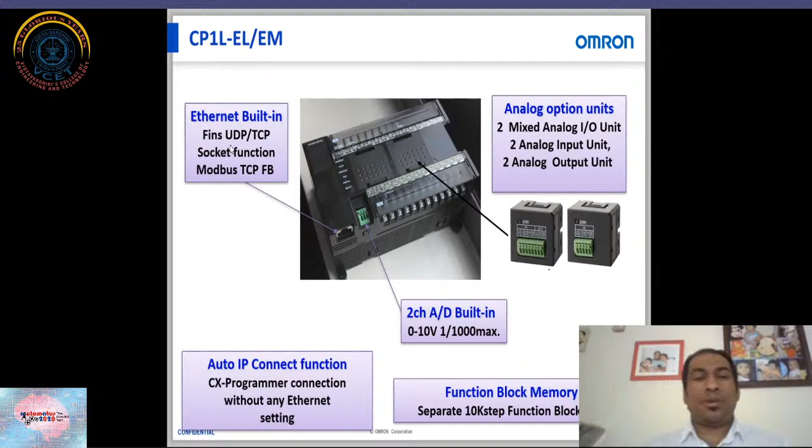Now some of the features available are the option slots which you can find here. The option slots are basically used in the PLC. In this particular model, 2 analog option slots can be put. This facility is not available in any other model. If you see other models, you can put only RS-232 and 485. But in this particular model, both slots can be given this option. That is, analog inputs can be utilized here.

And there is a built-in 2-channel analog input available in this. You can see it in green color. That is the built-in 2-channel analog input. 0 to 10 volt is already given by default.

Another good feature you can find on the bottom left is the auto IP connect function. Whenever you're trying to connect any device on Ethernet, it will always ask for an IP address. If you don't have the IP address, you can't connect to the particular device. But in this particular PLC, you don't have to put any IP address. It automatically detects the IP address in the network and it will connect.

That is, we have the function like auto IP connect function. Last one is on the right hand side bottom, you can find it is basically the separate 10,000 steps given for function block. If you see CP1E, that is a basic model from Omron, it doesn't have a function block system in that. You have only ladder logic. But if you see CP1L and CP1H, we have given the provision to write function blocks also. So you can write ladder logic and also you can write the logic in function block.

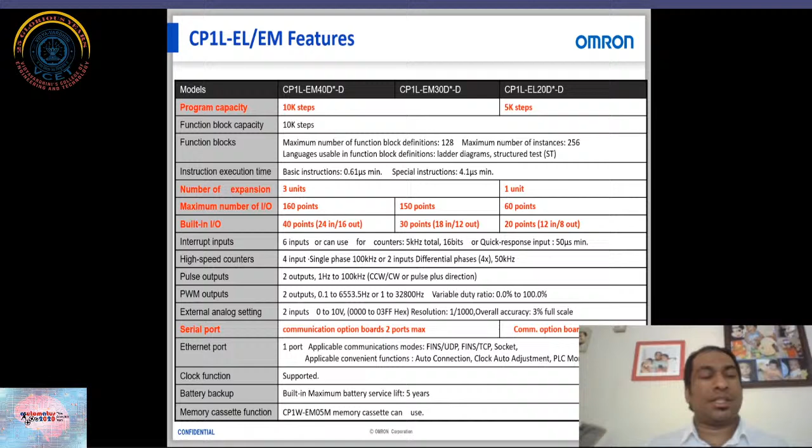Similarly, you have a CP1H model number structure where we have CP1H. Same thing applicable here also. CP1H, then X, Y or XA. XA comes with the built-in analog, 4 analog input and 2 analog output possible. But in this particular model, only 2 IO options are available, that is either 20 IO based system or 40 IO based system. And the rest of the things are common. So we have CP1H-X, Y and XA type. These are the basic systems available. This is the full series available.

So in CP1H-Y CPU units, the main feature is pulse train output having a speed of 1 megahertz. As I said, CP1H-Y is dedicated for motion control. In this particular model, you can connect 4 servo drives. All the Micro PLCs have a minimum connectivity of 2 servos. If you take CP1E, it can connect 2 servo drives. If you take CP1L, you can connect 2. If you have CP1H, you can connect 4 servo drives.

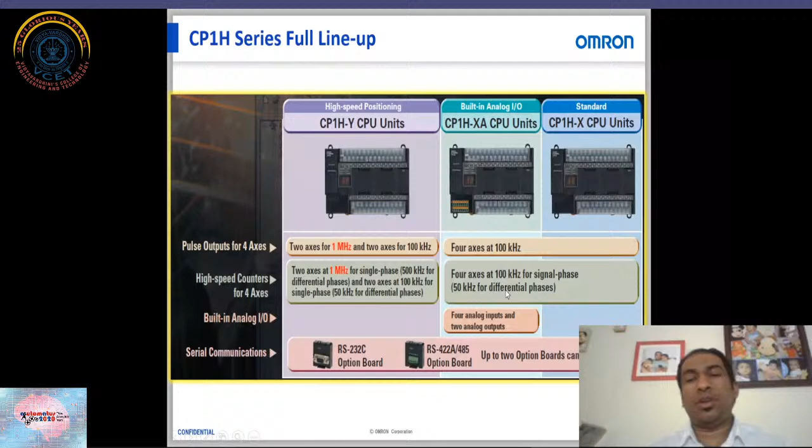And 2 axes have 1 megahertz speed. And the high speed counter also has 2 axes at 1 megahertz speed. This is the fastest clock speed we have in our micro series PLC. CP1H-XA, the middle one, is dedicated for analog. You can find 4 analog input and 2 analog output readily available. The speed is comparatively less, 100 kilohertz, and CP1H-X is a basic model.

Now coming to some of the features available. The main thing is programming steps available in CP1H PLC. This has a maximum of 20,000 programming steps. So if you are going to develop a ladder logic, you can write 20,000 steps using this particular model. And data memory size is 32K words.

Now coming to the CP1 option boards. CIF01 is used for RS-232 communication. CIF11 is used for RS-485 communication. And CIF12 is used for again RS-485 with a range of 500 meters. So we have 3 models. One is RS-232 with a maximum distance of 15 meters. Second one is 485 with a maximum distance of 50 meters. And third one is 500 meters. So based on your requirement, you can utilize.

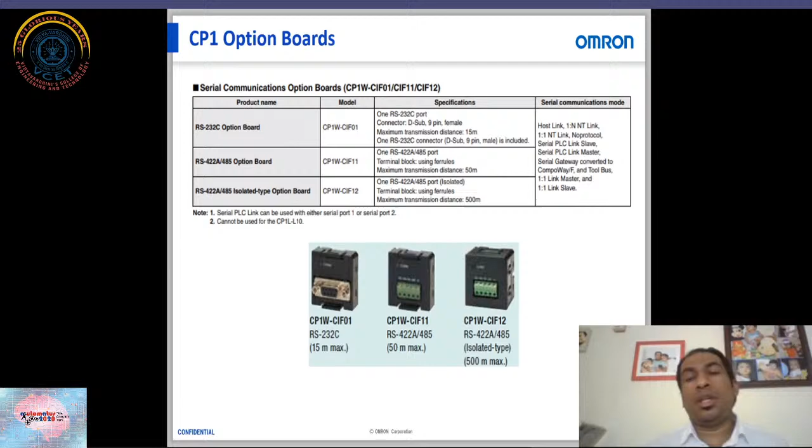So now let's talk about the new model which we have introduced very recently. We have CP2E models now available from Omron. CP2 is now one of the most advanced controllers we have in a compact PLC. The main thing is we can do the data collection and the interpolation part also. Some of the diverse functions are an efficient solution for flexible production, traceability, monitoring, everything can be done.

Improved connectivity to networking and serial devices, reduced development with predefined function blocks available for this particular model, and battery-free operation, you don't have to use a battery.

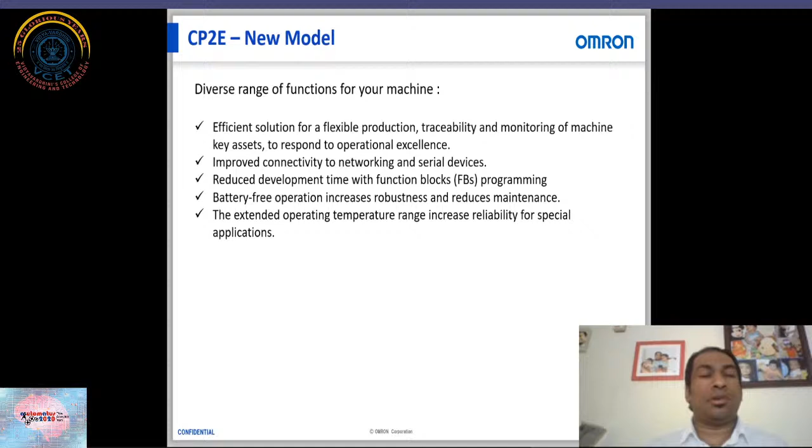The temperature range is comparatively good compared to other models. So what are the features we have introduced? I'll explain only the main thing. We have Ethernet ports, multiple Ethernet ports available for this.

If you see the compact PLC, you've already seen the CP1L-EL/EM series, wherein you've seen a single Ethernet port. But right now, this particular model has 2 Ethernet ports, which is a big advancement for compact series PLC. So the second Ethernet port — the first one can be used to collect data from some other device, the second one you can directly connect to your laptop for programming, or the second port can be used as a switch. Let's say I want to connect one PLC to another PLC, so I can simply use the second port and connect it to the other PLC.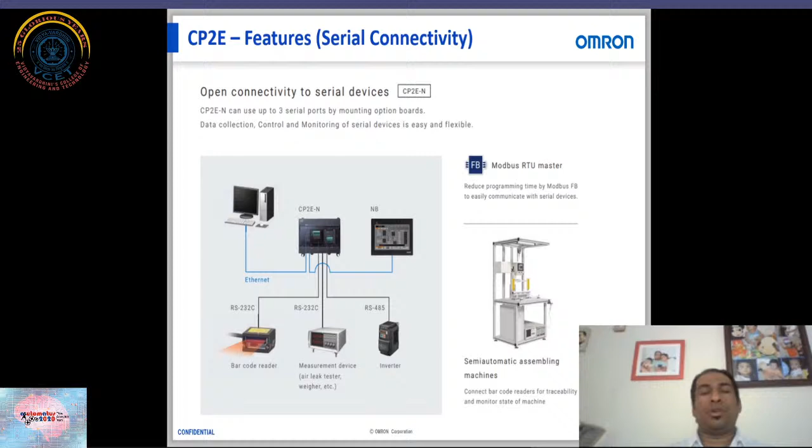Once the function blocks are readily available, you can just drag and drop them into your program to do the programming. Coming to the most important part, linear interpolation — you guys would have heard about motion or motion controllers, and you would have heard about servo drives, and so many things are available.

Linear interpolation is nothing but the coordinated movement of servo axes. Let's say I want to draw a circle — linear interpolation is not possible for that. The main purpose of linear interpolation is for pick and place applications. Let's say you've seen a gantry robot — the gantry robot will have movement, with multiple servo drives having a coordinated movement, because you have to pick up the product from a particular line and place it. So the X-Y axis will be involved in that, and that's where you'll be using linear interpolation.

Linear interpolation is basically coordinated movement of multiple servo drives. So if you have 4 servo drives, you can have linear interpolation using all 4 drives. Another thing is circular interpolation, which is not available in this model but is available in our other advanced controllers, wherein you can even draw circles. If you want to do something like a plasma cutting machine where you need to draw a circle, that's possible with the help of circular interpolation.

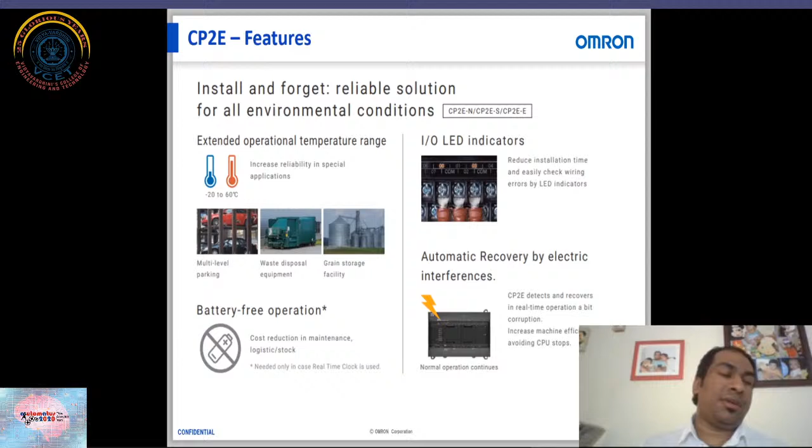We have inbuilt functional blocks readily available for the packaging industry. Some features include temperature ranges from -20 to 60 degrees centigrade, battery-free operations, LED indicators readily available on the terminal itself, and automatic recovery facility available in the controller. These are some of the features available in CP2E.

Coming to the CP2E product lineup, we have CP2E-N, that is a network-based controller, CP2E-S, that is a standard controller, and CP2E-E model. Just like you have seen in CP1E, this is an advanced version of CP1E, the second generation of the micro series. So CP2E network-based has multiple Ethernet ports.

The standard model doesn't have an Ethernet port, and the last one is a very essential model, where you don't have the provision for Ethernet, but we have some features available from our other models. So you can see all three: first is CP2E-N network type, second is the standard one, and third is your essential model, that is CP2E-E model.

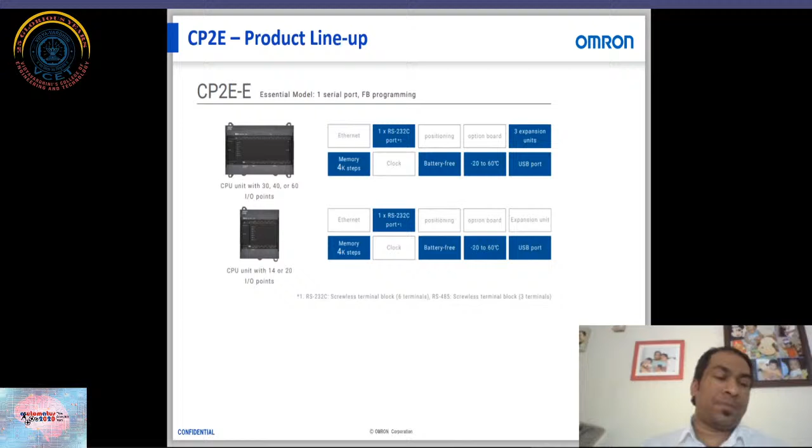And these are expansion modules, just like you have seen in the CP1E series. Similarly, you have provision for digital input, analog input, and also temperature sensing.

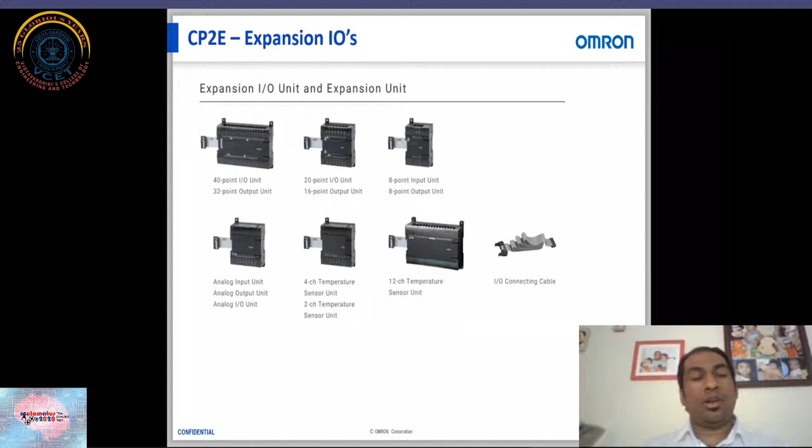Now coming to the PLC power supply part, as I said, we have AC power supply and DC power supply models available with us. So we have 100 to 240 volt AC, which can be connected to a PLC, and we have the provision for 24 volt DC also. So either you can use commercially available AC supply, or you can go with the DC power supply.

Then comes the input wiring. In input wiring, you can either go with a 2-wire contact, or you can have a 3-wire contact. So either you can have a sinking type where the common is different, that is positive common, and sourcing we have negative common. Only the common will differ, and the terminal power may vary accordingly. If you are using a positive common, it will be 0 volt, and if you are using a negative common, on the terminal you will get 24 volt DC.

Similarly, you have output wiring also, where you have relay and transistor type output. In relay, the polarity doesn't matter where you are going to connect the load, positive or negative. But if you are using transistor type, you have to always consider the NPN and PNP possibility. That is, NPN has positive common, PNP has negative common. This should always match with the sensor you are using in the field. Always keep that in mind.

And another important thing to keep in mind is, whenever you are using high-speed applications or servo based systems, always use a transistor type, because the output you are sending, that is PTO output, should have high speed switching. If you are using a relay, you will not get that much speed. So always consider, whenever you need high speed switching in a servo based system, go with the transistor type output.

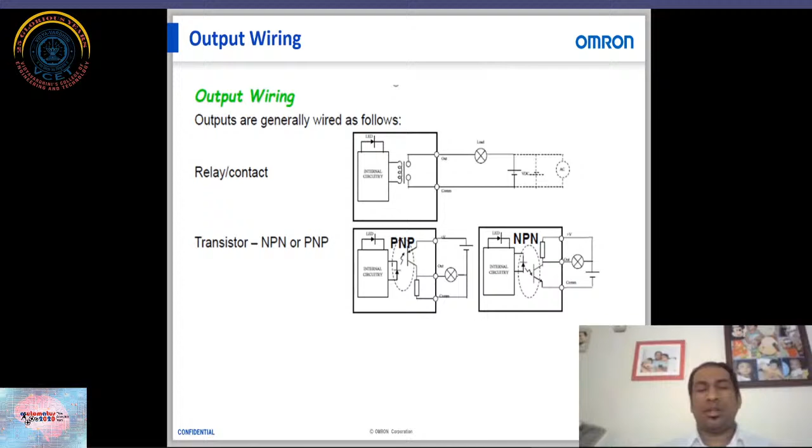People may have different memory areas. Our memory matrix is nothing but the word dot bit concept. Memory matrix is a diagram showing PLC's internal memory area. Our system is composed of words and bits, that is binary. Bits we call binary. A word or channel, and always a channel for Omron is 16 bits. So one channel is 16-bit information, that is 2 bytes of data.

These are the different memory areas available in our PLC. As I told, input interface and output interface are there, and inside you have the PLC CPU. Similarly you have input bits, that is CIO areas, which we call common input output areas. Then we have CIO output, that is output areas.

One thing to keep in mind is in Omron Micro PLC, that is compact base PLC, input always starts with 0.0 - so 0 is the first channel available in the input side - and output always starts with 100.0. So when connecting any output, the first output should always start with 100.0, then 100.1, 100.2, and so on.

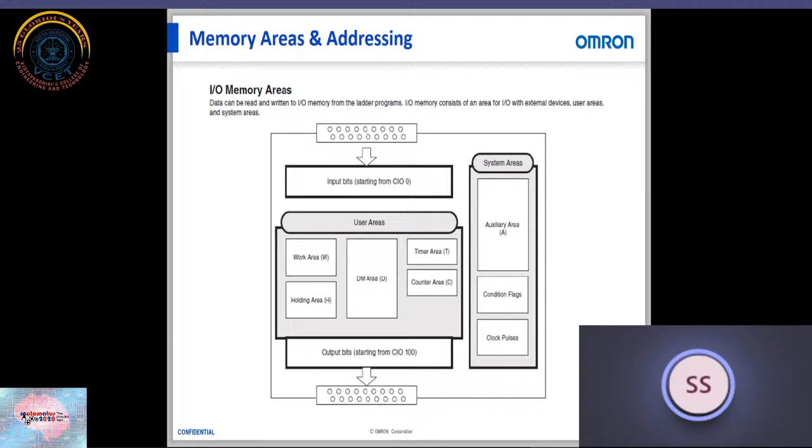You don't edit much on these areas - it is auxiliary system area, with conditional flags and clock pulses available. Then IO allocations - in compact PLC we have options like different channels to be utilized.

In Omron Micro PLC, always keep in mind that in one single input channel you can use only 12 bits - the rest of the 4 bits are reserved and cannot be used. So when I say 0 channel, it will always start with 0.0, 0.1, and go up to 0.11. It will not go more than that, because 12 to 15 cannot be used in Micro PLC. But this restriction only applies to Micro PLC, not to medium or large IO or advanced controllers, where multiple areas can be utilized.

Similarly in output, you can utilize only 8 bits - one channel means 8. So if we talk about CIO 100, that is 100.0, 100.1, it will go up to 100.7. Then the next channel starts at 101.0. So if you want to use 100.8 or 100.10, that is not possible. This is one point to keep in mind when selecting Micro PLC in Omron - input channel always takes only 12 bits, output channel always takes 8 bits.

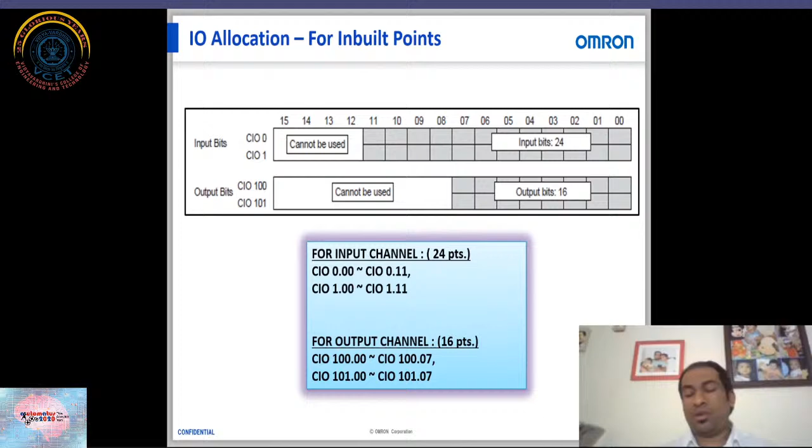Some of the memory areas available: common input output area is where your physical inputs are connected. Data memory area is basically to store the data, and if you want any word memory or word area, data memories can be utilized. This is retentive memory - even if power goes off, the value stored in D memory will always be there, you don't have to worry. So this is data memory.

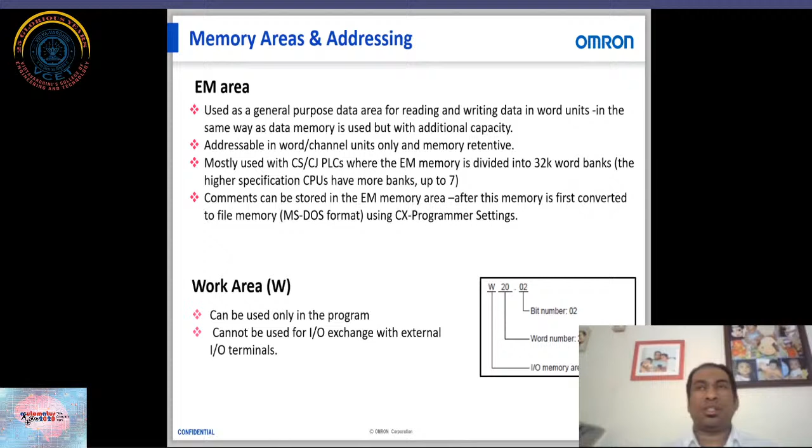Then EM memory is similar to data memory - it is additional memory used just like data memory. Then we have work area, which is nothing but the memory bit you use. Some other makes may have a different name - if you take Mitsubishi, it is M bit; if you take Omron, it is W bit. We call it work area, and you can use it for so many purposes, but only within the program. This particular area cannot be used to transfer data with external IO terminals - if you want to transfer data to IOs directly using W, it is not possible.

Then we have holding areas, then timers and counters. So if you take any model, the total number of timers and counters will be the same. If you have a particular model with 256 timers, 256 counters will also be available in that particular model. If you have 1024 timers, it will be 1024.

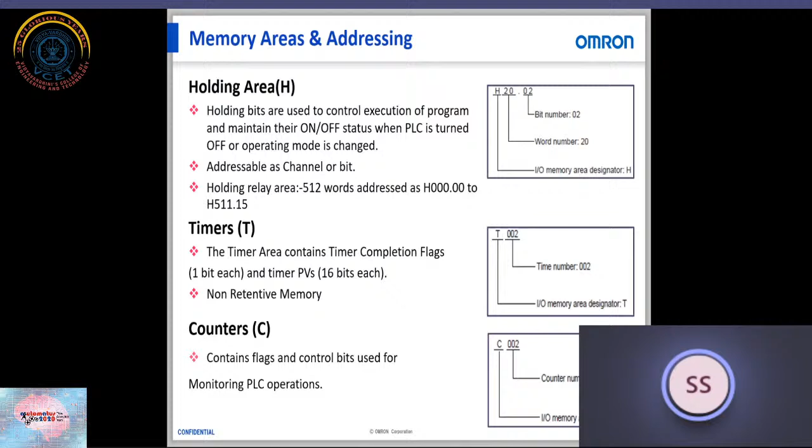So we have the holding area. Holding area is basically a retentive memory, a retentive area where you are going to use that particular area. Even if power goes off, the bit status will remain the same. So if the power goes off and the particular switch is going off, you don't have to worry about it.

If you are using a single channel for your base unit, the immediate next channel can be used for your expansion. So in the example, you can see channel 0 is used for input, CIO 0. If you're connecting an expansion unit, immediately the next channel can be utilized. That is 1.0, it will start to 1.11. Similarly, in output, if you have a single channel in the base unit, 100, 100.0 to 100.7, the next channel will start from 101.0 to 101.7. So directly you can use the next available channel.

Let's say in the base unit I have used 2 channels as an input. So 0 and 1 I have used. So you can use the third channel, that is 2.0 to 2.11, in your expansion. Now these are some of the very few things which I have explained about PLC.

If you talk about PLC, it's a very big topic to be explained. In this particular session, I am able to cover only very basic things about PLC. Maybe in the coming future, we'll be having more sessions where we can impart more knowledge on the PLC part, how the advanced controllers work, everything. But right now, I have the provision to show only very few things because of limited time. So in the coming sessions, you may expect more from Omron.

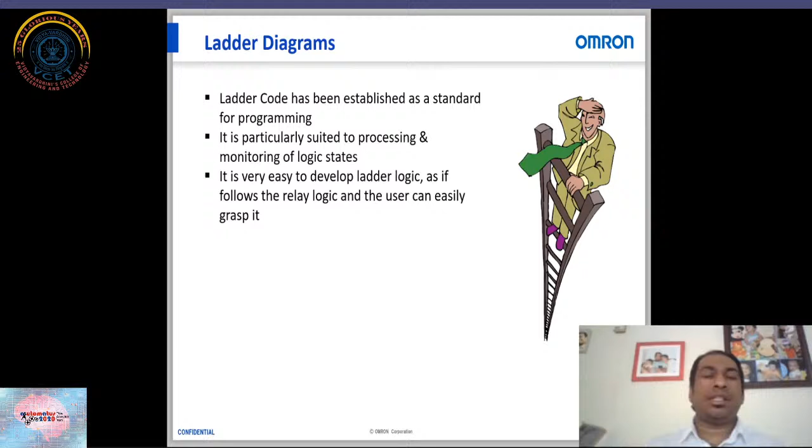So all these 5 are in IEC 61131-3. That is the standard for programming languages. In that, all 5 programming languages are available, and ladder is the most commonly used by all the manufacturers now. Ladder logic, instruction list, structured text, everything is available now. We have function blocks also.

So it will have contacts and coils, which are the components of a relay. Similarly, the PLC ladder logic is derived from that only. I'll explain a few of the components in ladder diagrams. In the second half of the session, I'll be explaining more of the programming part. But right now, I'll just give you an overview of the product and some of the components available.

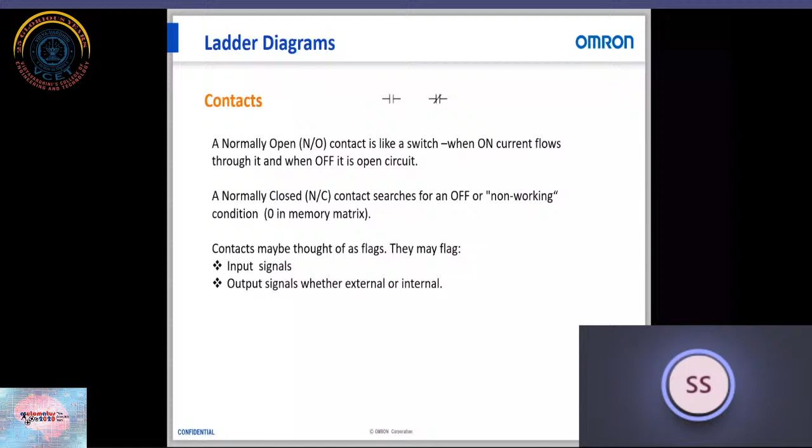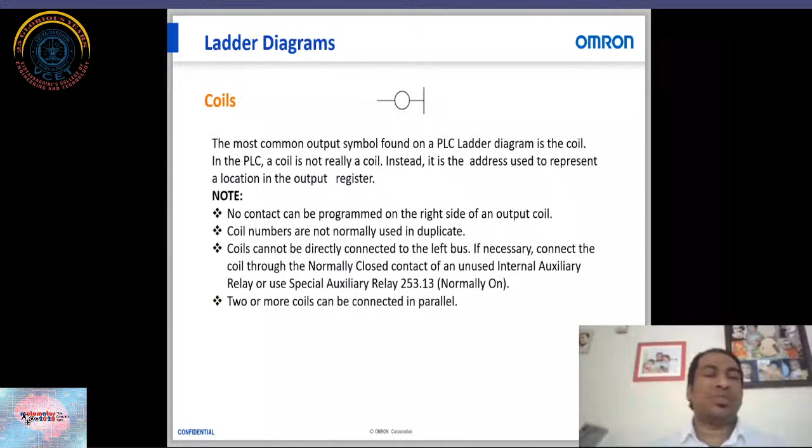The coil is normally used on the output side of the ladder. There are some criteria for writing the ladder logic. On the input side, you should always go with the contact, and on the output side always go with the coil. Then we have instructions. There are certain instructions which you can use to perform higher order functions. Let's say if you want to move data from one place to another, you can use the move instruction.

Or if you want to use, let's say, arithmetic operations, I want to add two data. So add operation is there, subtract operation is there. So many higher order functions can be used with the help of instructions.

Then there are certain general ladder rules. The program can be executed from the first address to the end. Criteria will be like it should be starting from left to right, from top to bottom. So many things are there. You cannot use a coil in the starting of a ladder. So there are certain criteria which you can see when you are doing the programming part.

Talking about the programming device, we had a programming device earlier when old PLCs were there, as explained earlier also. We had a programming console earlier. Now we have programming software where you can use your laptop or desktop to do the programming. You use a programming device to enter and monitor the program. Like if you want to write some logic, or if you want to monitor or see the running PLC program, that also can be done with the help of the programming device or the programming software.

So we have two programming softwares available right now. CX Programmer is one, and the other programming software from Omron is Sysmac Studio. CX Programmer is widely used for programming and monitoring of PLCs. This is mainly used for programming ladder logic and function block diagram. Okay, and another is CX-One. It's a package of softwares. 9 or 10 softwares are available in that package. In that, CX Programmer is one. So this can also be utilized.